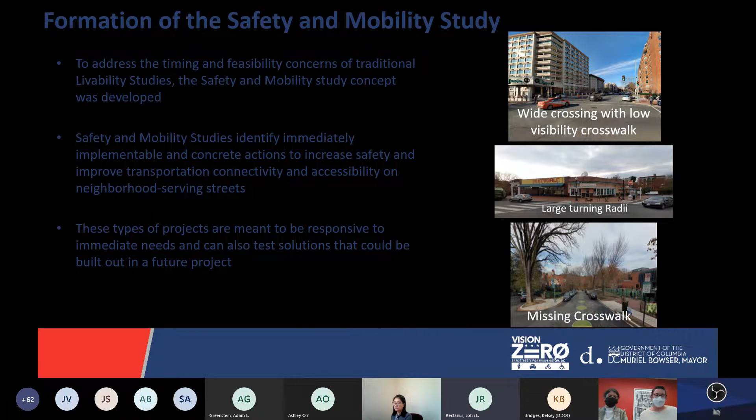So the expected outcomes of the safety and mobility study were essentially to focus on those short-term quick build projects. We are identifying and looking at 40 intersections within the study that we believe can be accomplished within 3 years, install 10 of those projects during the study, and install art in 5 of the 10 immediate installations.

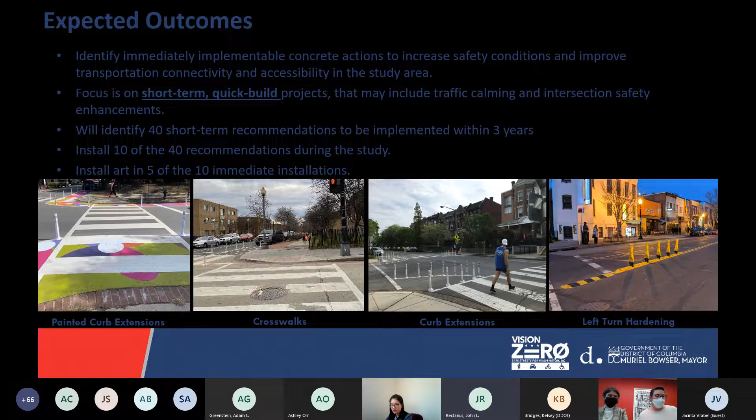So the Near Northwest 3 study, this was the study area that we looked at for this initial study. It actually has a very large population that commutes in ways other than a single occupancy vehicle. You can see the breakdown of that distribution at the bottom of this slide. It extends and has a huge portion of the district's population.

It includes 6 local ANCs, which are our smaller bodies that assist with neighborhood communication with DDOT and other government entities. It goes all the way down to the convention center to the south. It's between 2 major corridors, Georgia Avenue and 16th Street, with Mount Pleasant a little to the northwest. So it's a very diverse, dense area.

That was something we had to try and look at, making sure we're incorporating things throughout the corridor that can be beneficial to a community that, compared to the rest of the district, has a pretty large walking, public transit, and cycling community.

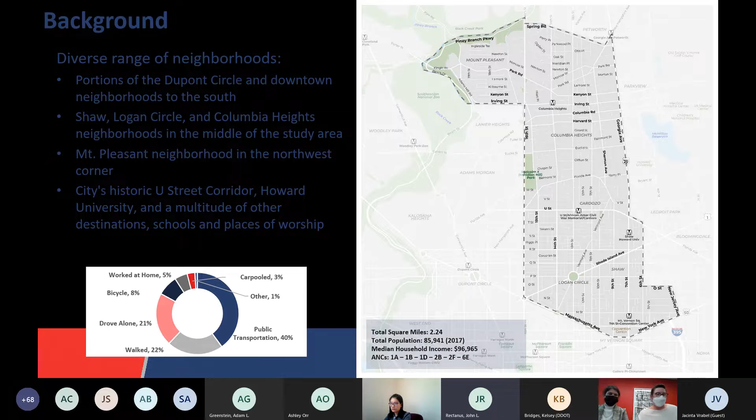We gathered information to come up with a preliminary assessment, like what has been asked in the past that maybe we had not delivered on, what is being asked now, and looking at past crash data, things of that nature. Then we evaluated those concepts and locations, and started looking at our toolkit to see what locations made the most sense, that we could have a larger impact.

Then we shared those with the community, revised them, and essentially we ended the project with 40 different design plans. The public engagement process—this was DDOT's first time incorporating an all Spanish component as well.

We had all of our meetings in English and Spanish, and our materials as well. We distributed throughout the corridor, and it was a good experience in terms of learning how to reach a community that, although we've always had access options, needed something more deliberate based on the community we were working with.

So I'm going to go through how we selected those 40 locations for treatments.

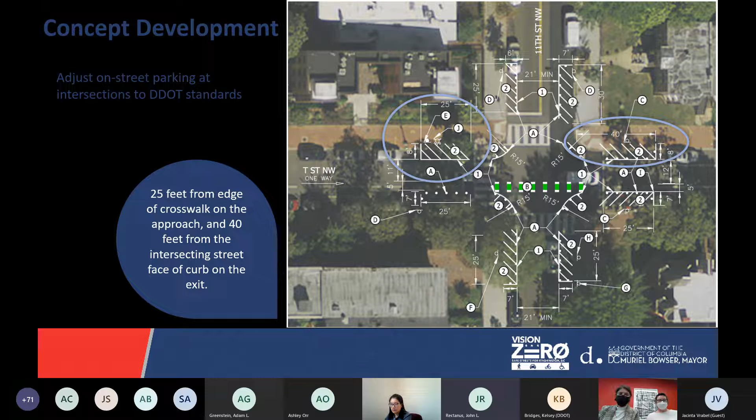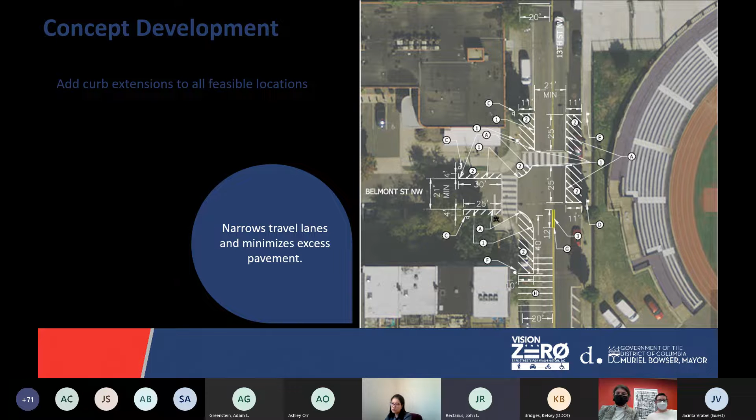We also looked at curb extensions where we could, pulling that curb out and bringing the curb radii to DDOT standards. So wherever we could get a 15-foot curb radii, we added it.

And then tightening up and teeing up intersections. We have some corridors that are all on angles, so most of their intersections are not at a T at 90 degrees, and we focused on teeing those up as much as we could.

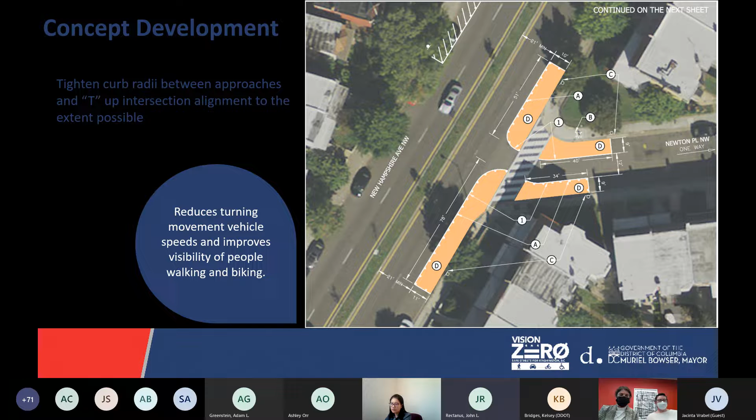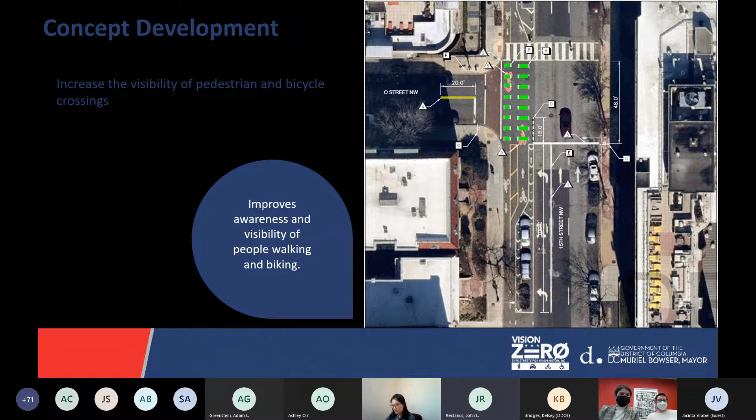And then just increasing the visibility of pedestrians and cyclists. Where we had bike lanes crossing, we wanted to make sure we were adding the green stripes through it. Where we could reduce the width of a pedestrian crossing, we did. Where we could add high visibility, we did. And lastly, we looked at where we could add left turn hardening to slow down those vehicles making turns so they can see the pedestrians as they're coming on.

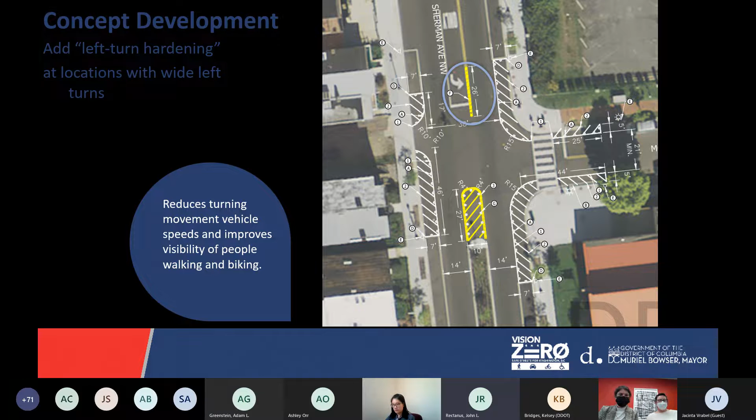Implementation. As I noted, we implemented 10 projects towards the end of the study, so essentially we went from our concept design to implementation within like 2 to 3 months. Obviously there was a lot of internal work to make sure we had that teed up so we could hand off the designs to be installed.

This helped bridge the gap of DDOT making plans but not always implementing. These projects, one of the things we said to folks who might not have been as excited about a tactical curb extension versus a concrete built-out curb extension, is that this gets the safety element in now. When we come back through with a streetscape or general paving, it's something we can make more permanent. So it's about how we can get the safety elements in now and have the same benefit, with some of the visual concerns addressed later or through art.

So with those designs, we put in the 10, and 5 of them did have art. We also, for the remaining 30 designs, had these cut sheets that you can see an example of to the right, showing Barry and 10th, which shows a tactical traffic circle, and a comment from someone who was very excited about incorporating the traffic circle.

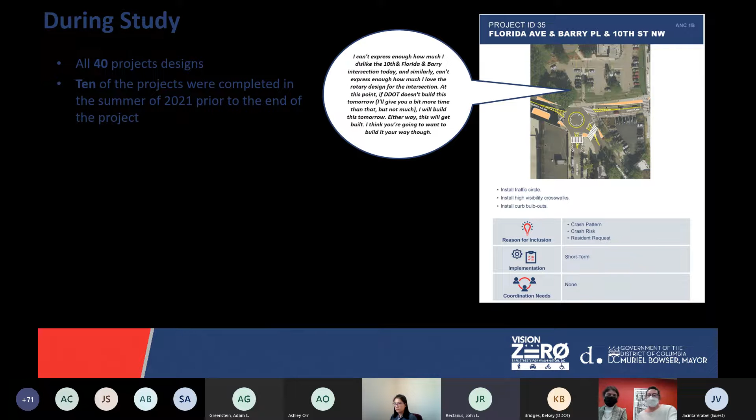As I mentioned, one of the criticisms tactical installations get is that they frequently get run over, aren't maintained very well, and aren't visually appealing.

We've incorporated art in other locations in the district, but this is the first project that's been part of a larger study. Whether talking to the artist or reading community comments, it really made people feel a new association with the space. It wasn't just a parking spot anymore; it became a neighborhood icon, viewed as public space in a different way.

So we included art that tried to reference the community and the history of the space. The top element with the zipper...

This piece celebrates Alma Thomas, a world-renowned artist who lived just a few houses away and is now featured in many museums, having a moment in lots of different areas. She lived nearby, and this is placemaking in terms of recognizing the history in this neighborhood that has seen a lot of change.

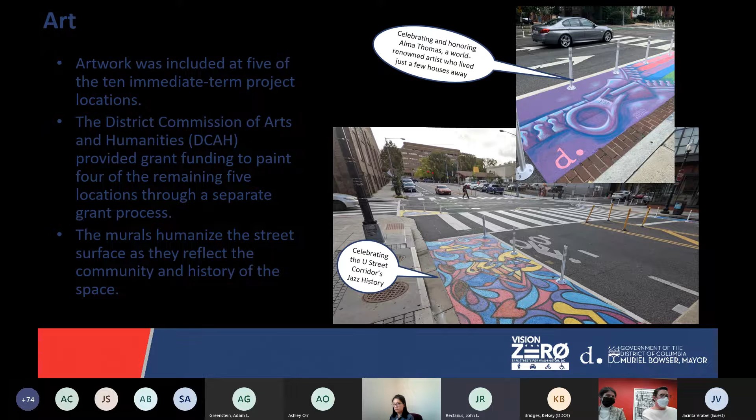Post-study, after finishing and implementing 10 locations, one of the great things is that the study included creating not just cut sheets but plans, shown at the bottom, that we can hand off to our contractors to install. It's a standalone document with the number of materials, what the materials are, and essentially all the dimensions needed, so someone can quickly install it.

This is true in lots of governments: towards the end of the fiscal year, you start looking at what money is left and what projects can be reassigned. Because we had ready-to-go projects, we were able to get 6 additional locations implemented within a month.

Some of them even incorporated art. This is something we didn't necessarily know would be as valuable as it was—we were able to quickly take advantage and have plans to install, essentially almost doubling the amount of installations we had promised at the end of the study.

We also found the benefit that this can easily be passed off to our stormwater team that does LID, or our engineering team. Even if they're not putting in something tactical, they can incorporate the design into something more permanent, including turning radii and things like that, which made the pass-off much easier.

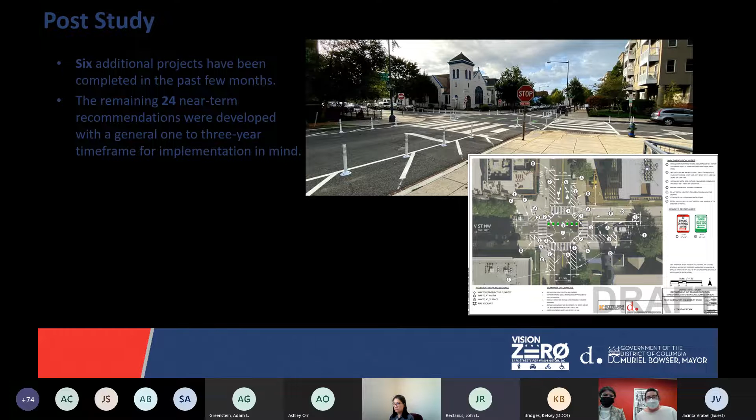I also wanted to show a picture. As mentioned, a lot of these projects were simple tactical intersections, but we left room for a few locations with what we called complex intersection designs. This one has a lot of paint and markers because it's a large intersection that could be narrowed, but this location doesn't really remove any existing vehicle parking. It's amazing what we're able to do here without necessarily changing how the intersection works. We have about 5 projects that fall into this complex intersection category that may need a little more internal work.

We definitely want to reach out to the community again before we implement this, because it would visually appear like a big change, even if what we're proposing doesn't automatically drastically change the existing conditions at the location.

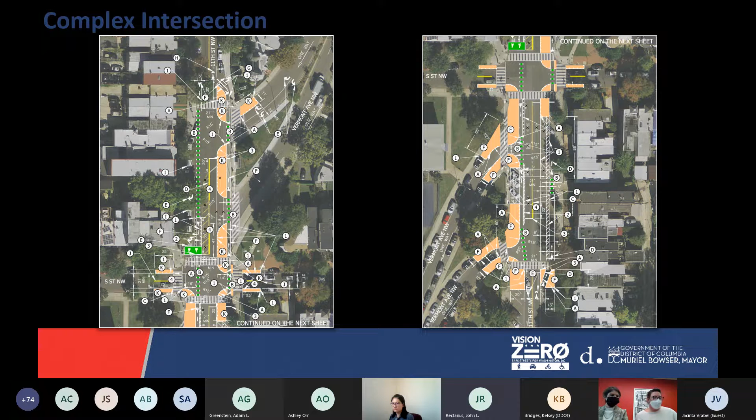One of the other things that the agency is learning is how to be a little more transparent with our projects. It is common for projects to be lost in the ether or a project website domain to be taken over. This is a DDOT website, it's attached to us, and we are also incorporating a project tracking element.

So not only can you go onto the website and see all of the designs, if you have a question or want to bring it up, print one of them out or all of them, you can also look at this interactive map we have that shows what projects have been implemented and when the remaining ones are expected to be implemented. And if you live on a special block and have a particular interest in a project, you can also look at that specific component.

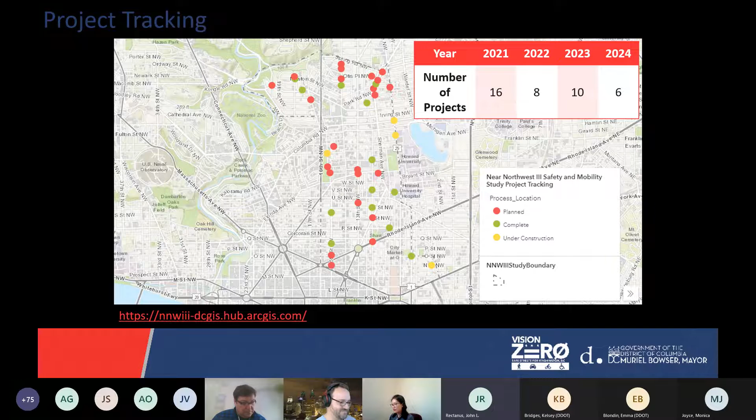Andrew is a senior engineer and a planner with the transportation policy team at the Montgomery County Department of Transportation. With 25 years of experience and a background in traffic design, operations, and safety, as well as special events and emergency management. For the past decade, he has focused on policy, master planning, capital projects, development review, and a breadth of miscellaneous efforts that do not quite fit anywhere else. He has been a member of ITE since the early 2000s, when he served among the leadership for Penn State student ITE chapter.

Steve is a transportation engineer planner with 36 years experience in transportation planning and traffic engineering. He works in the countywide planning and policy division, and he is in charge of highway planning, CIP, transportation agency coordination, and transportation mandatory referrals. Prior to joining Montgomery Planning, Steve worked in the private sector for most of his career, focusing on corridor planning, access management, highway safety, traffic operations, and signal design. He has been a proud member of ITE since 1987.

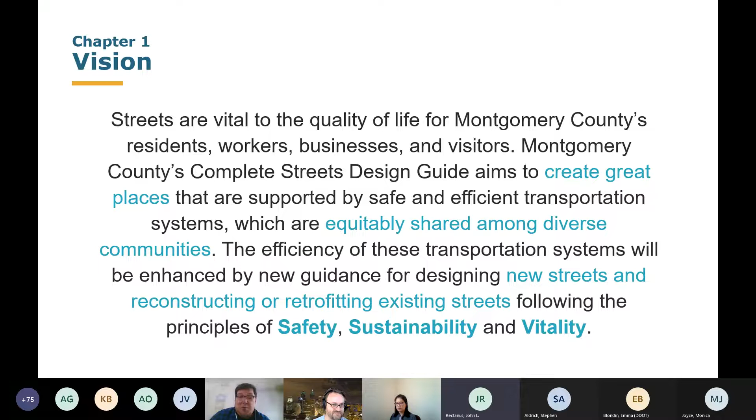The vision presents the goal for this chapter, which is to develop guidelines to help transform streets into great places that are equitably shared among diverse communities, following the 3 principles of safety, sustainability, and vitality. Montgomery County has over 1,000 lane miles of streets, and while this guide is intended primarily for county roads, we're hoping this is really the vision for what we'd like to see on state highways as well. It's critical that safety for all people is a key behind this plan.

Chapter 2 presents new street types that will be used to establish design priorities and parameters for individual streets. In Montgomery County, we've had street classification since 1931, probably one of the few counties to implement their own classification system. I think what we realized is we kept trying to change it as more advances happened, but we realized with complete streets, we really needed to rethink our street types entirely.

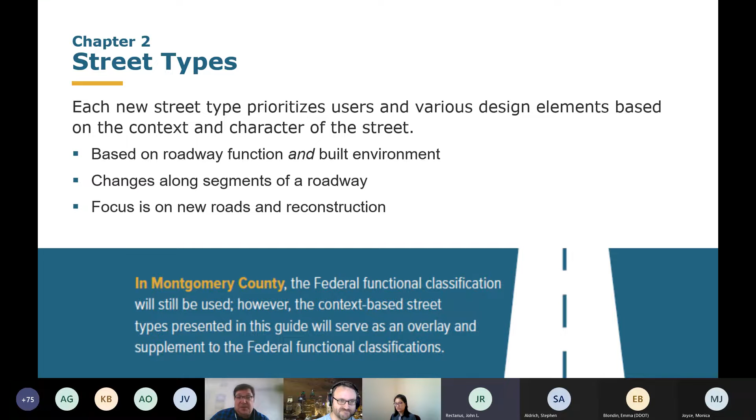These street types focus on the types of streets we want to be building moving forward, and they're largely defined by land use and urban form, as well as transportation function. They're going to vary a lot more because you may have an arterial going through an entire county, but it changes from rural to suburban to town center to different forms of urbanization. That's what we wanted to reflect.

There are 12 street types that we've developed for the county, and you'll notice some commonality between the names. They reflect several major land use contexts: downtowns, town centers, neighborhoods, and country areas. What's not listed there is suburban, which are largely the areas that are not highlighted.

Each street type in the guide has a 6-page spread that starts off looking like this. This is an example of the first street type, downtown boulevards. These are the main streets you would find in some central business districts. In Montgomery County, that would be Bethesda, Silver Spring, Wheaton, and White Flint. They typically have BRT routes planned along them and have frequent transit service and high pedestrian and bicycle activity.

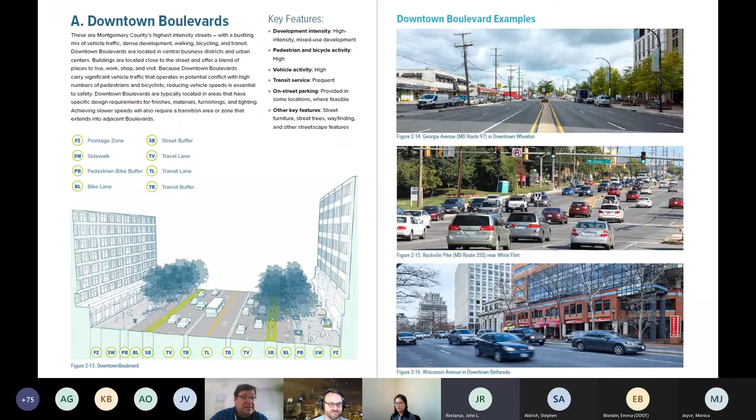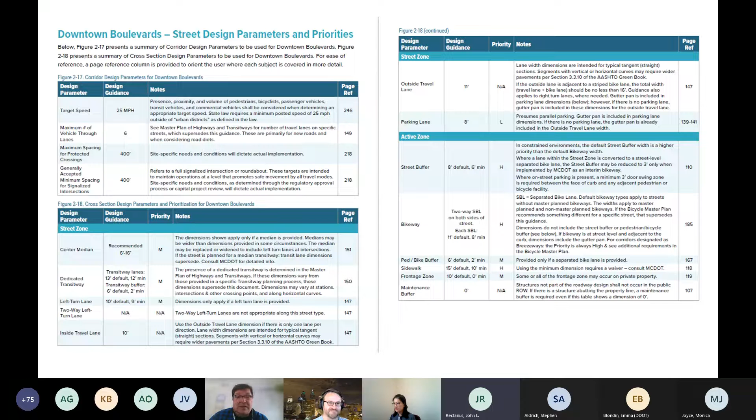The 3rd and 4th pages for each street type provide detailed design parameters. It's a little difficult to see here, but Andrew's going to provide a much better overview of the technical details. The idea is that you can turn to this and get all the technical information you need about the required elements along each street type. The remainder addresses the widths of various items in the cross-section and their default and minimum widths and priorities. The priority is really important, and Andrew will talk about this in terms of how you actually make everything fit, because fitting all these components into a master plan right away isn't always possible—so there has to be some kind of priority system.

The last of the pages for each street type is a list of street design features, and identifies whether they're required, recommended, optional, not permitted, or not applicable.

I did want to mention the current draft—you may see red pages here and there, and that's because the document, while approved, is still in draft form until we pass through a county council review and incorporate the changes into the county code. At that point, a final version will be produced.

In addition to core street types, there are also more rare or unusual street types that the guide will touch on briefly. Many of these are already covered in county code.

We have not found alley designs to be high level detail, and our experience with shared streets, known as woonerfs, is still limited. There are two types of rustic roads currently used in Montgomery County. Those are pretty much rural streets with a hands-off approach, trying to maintain the rural rustic character of those roads. Those are incorporated by reference within our document, and in future versions we might tackle the shared street issue a little bit more.

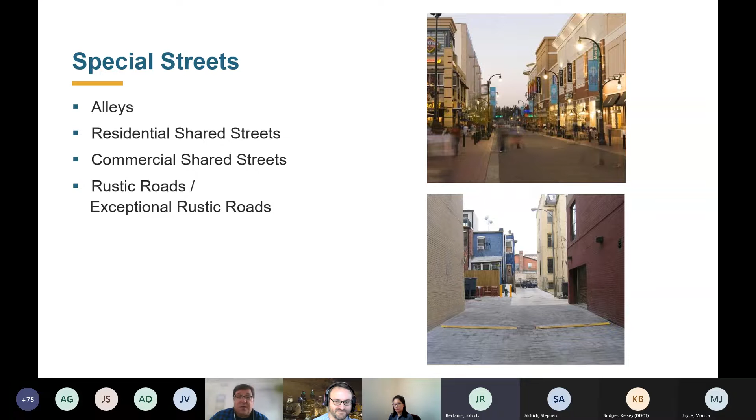Now with that, I'm going to turn it over to Andrew, who is going to take us through a deeper dive in some of the design details. Good afternoon, I'm Andrew Bossi with the Montgomery County Department of Transportation.

I'm about to talk about a whole lot of zones. First, there are two overarching zones: the active zone behind the curb, and the street zone within the curb. Each includes smaller zones within them that I'll dive further into. Two things I'll call out here are the bikeways, shown behind the curb in the active zone, buffered on both sides from street traffic and pedestrians. The triptych graphic on the right also shows bikes might share with pedestrians on a side path, or they might be retrofitted into the street zone, within the curb-to-curb street area.

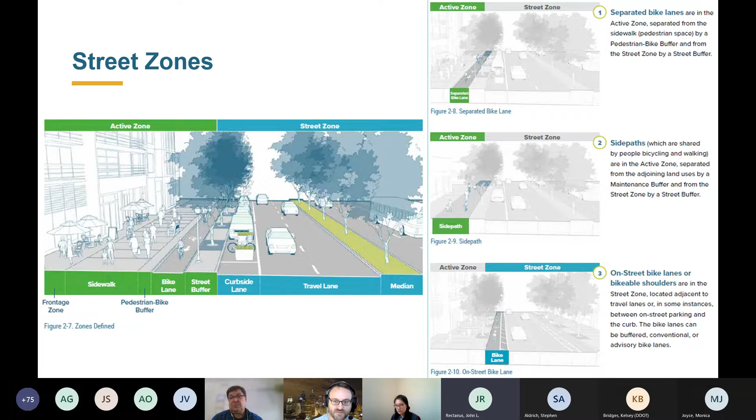Now to dive into those zones, Chapter 3 focuses on the active zone, which includes elements between the curb and the property line.

On the outside, the maintenance buffer and frontage zone are up against the right-of-way line. They allow for ease of maintaining the adjacent sidewalk, and can also serve as amenity spaces like outdoor cafe seating. Where right-of-way is constrained, they're often among the first areas to be cut, though a 2-foot maintenance buffer is required if there's a building or other structure along the property line.

The sidewalk or side path area is intended to be completely clear, meaning no signs, poles, or inaccessible grates. It's supposed to be as straight as possible, and pavement must comply with ADA requirements. These clear zones have been our standard for many years, but this is mostly just making them even bigger, particularly in downtown and town center areas.

Next there's the pedestrian bicycle buffer, bike buffer, and then the bike lanes. The vision is for bike lanes to be part of the active zone, improving their separation from motor vehicles as well as pedestrians. The buffer separating the bikeway from the sidewalk and side path might provide street side furniture, depending on width, that could have trees, benches, bike racks, or space for dockless vehicles. It's a versatile interface between bikes and pedestrians.

The street buffer zone is the separation between bikes and motor vehicles. That's where you usually find landscaping in particular, with poles, signs, parking meters. It might be used for stormwater management and other green streets efforts, including trees. Open section streets might use the street buffer for graded drainage ditches. Basically, the street buffer is envisioned to be a really versatile area that knits together the street zone and the active zone.

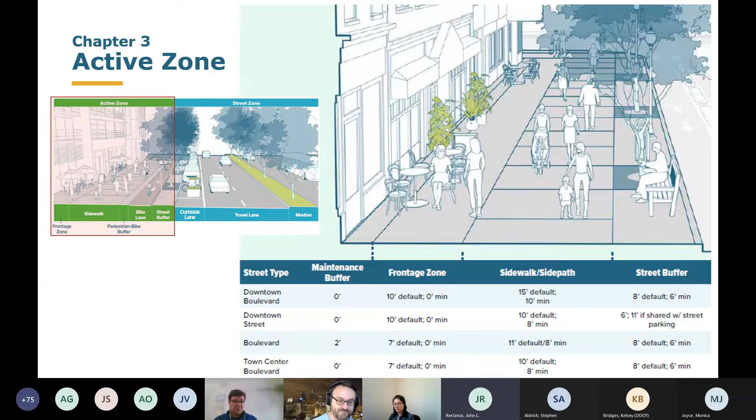Chapter 4 focuses on the street zone, the vehicular area between the curbs. This area is comprised of three smaller zones: the curbside zone, which has parking, loading, and parklets, and might also include retrofitted bikeways; the travelway zone; and the median zone, which includes the travel lanes, transit lanes, and median.

The chapter also includes guidance on car share and electric vehicle parking, mobile food vending, micromobility corrals, utilities, and network connectivity. Network connectivity is planning level guidance, not quite as engineering-focused as much of the manual, but it basically says we want streets to link up to other streets to provide redundancy, and to get away from dead-end streets, especially those that hinder pedestrian and bicycle movement across them.

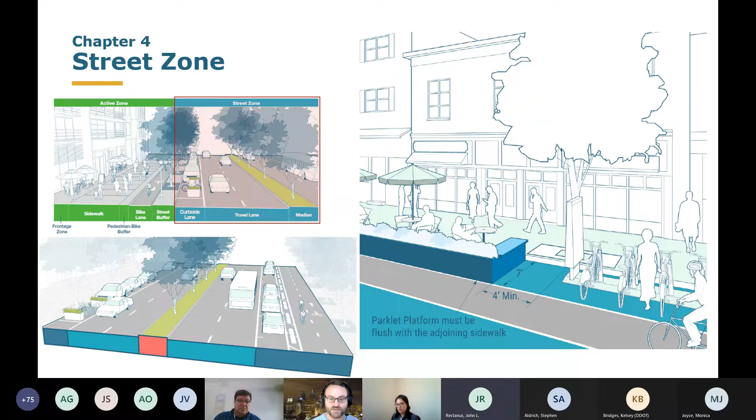The guide includes widths for each street feature, including travel lanes, as you can see on the screen here. The current road code calls for narrower lanes only in downtown areas, and we're looking to take this even further, perhaps most noticeable in the town center and neighborhood areas. This is an important part of both slowing traffic as well as reducing crossing distances for pedestrians.

Our guide does call out that there may be reasons why these lane widths might need to be wider, such as if there's a high volume of large vehicles like buses or major truck routes. Another thing to keep in mind is along horizontal curves, where your effective width can shrink and you need to widen your envelope slightly to account for a vehicle's envelope as it goes around the curve. With a minimum street width of 21 feet, this fits within fire access requirements.

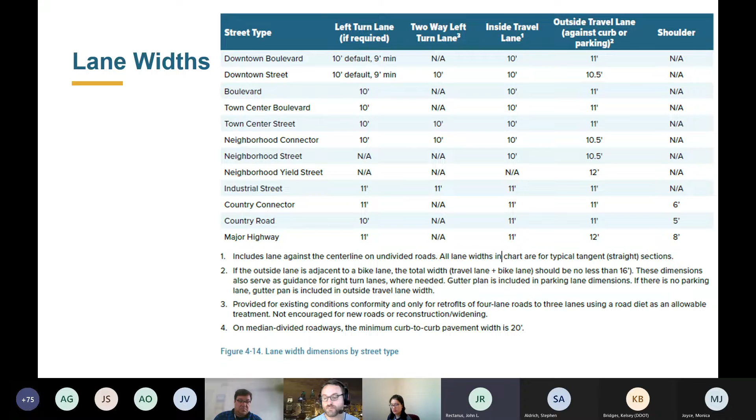This also allows for fire access needs along one-lane streets, which require 12-foot lane widths and periodic 8-foot emergency lane access areas. While we have guidance on two-way center left turn lanes, this makes it clear that these really aren't a preferable treatment and should be used only in limited circumstances.

Before I get to the next chapter on bikeways, I want to divert briefly to prioritization. As Steve mentioned, we have prioritization for each street type and each street feature. When there isn't enough right-of-way to fit everything in, that priority provides guidance on how to go about reducing things. Each street feature has a default width that we would start with, and then as we need to shrink things down, there's also a minimum width that we can shrink toward. You'll see that maintenance buffers, medians, and on-street parking are often the first to be reduced.

Street buffers, sidewalks, side paths, and bikeways are upheld across nearly every street type. If you narrow things down to their minimums and you still need more space, cutting things not included in master plans may now be an option. In my piloting this since about early 2020, I've found that this often means cutting parking in order to avoid cutting down higher priority elements like the stuff in the active zone.

Of course, if a master plan calls for something, the expectation is that it cannot be cut. It needs to be provided at some point over the lifetime of that master plan. That is an example of where acquiring additional right-of-way may become necessary, though I've not found this to be necessary in the vast majority of cases that I have piloted this on.

Chapter 5, following the active zone and the street zone, focuses specifically on bikeways. This largely pulls directly from our bicycle master plan, which was completed in 2018. It's a fantastic plan. I urge everyone to take a look at that, and maybe I'll try to remember to put a link in chat when I finish speaking here.

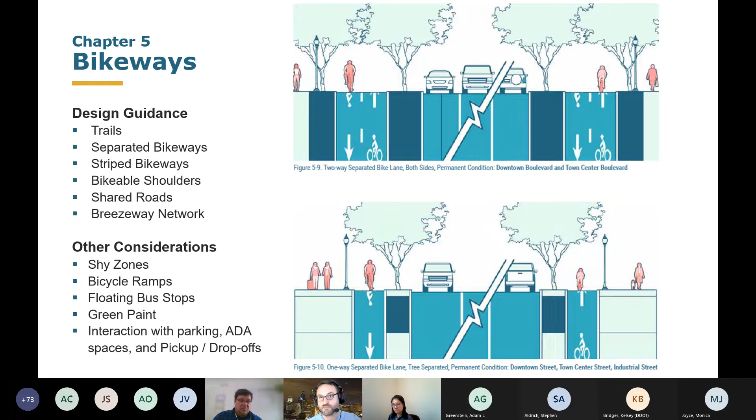Default bikeways are shown here for each street type. Master plans can override these defaults, as can detailed engineering if it's found that something different and hopefully better makes more sense. Most notably, our guide suggests separated bike lanes in downtown and town center areas, which helps separate traffic by giving bicyclists their own spaces apart from both motor vehicles and pedestrians. In areas with fewer pedestrians and bicyclists,

shared ped-bike side paths remain the default, but they are generally proposed to be wider. There are of course some areas, even in those more rural areas, where things like separated bike lanes might still make sense. As I mentioned, this just lays out the defaults—as part of master plans or engineering, those extra needs can be identified and refined.

The bike master plan also added something called breezeways, which I don't think are reflected on what I have on the screen here, but they're basically like bike highways. They're intended to be high quality, high separation, and wide enough to allow side-by-side riding. This guide includes some basic design guidance on these, and I expect that will continue to evolve as we get a better sense of those facilities over time. Right now, we don't really have any built, but we'll get some eventually.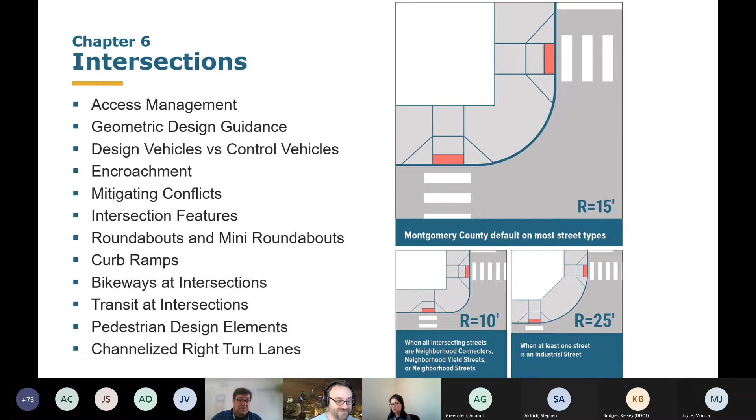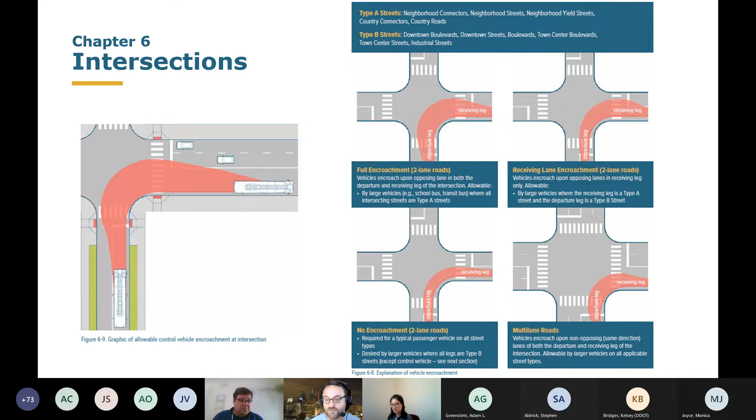At the left, there's a single example showing and allowing full encroachment when it comes to control vehicles, again fire trucks. This helps get us away from the longstanding practice of building overly large intersections centered around fire trucks, when in reality a fire truck has greater capability than many vehicles to command the right-of-way and navigate with encroachment. These turning patterns were developed in partnership with our fire staff, and we're glad to have had them as partners in these efforts.

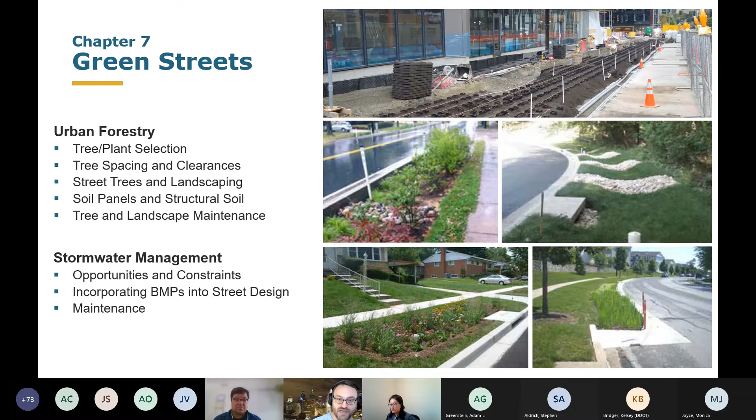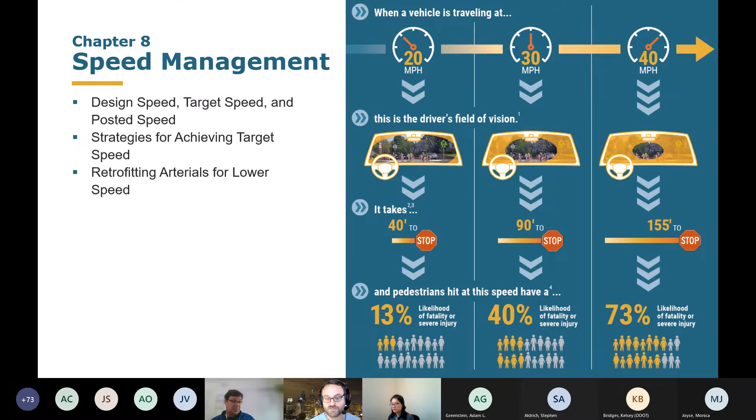We generally use 4 different types of speeds: target speed, design speed, posted, and operating speeds. Each sort of leads into the next, and the ultimate goal is for all 4 to eventually be equal. The target speed is basically a master plan speed, and that's what is covered by this guide. It's the ultimate speed that we want motorists to travel at in the lifetime of a master plan.

The design speed is what engineering would use, to try to get people to that target speed. Posted is what goes on the signs, which should reflect the design speed and the target speed. And then operating, hopefully following the signs, which is the design, which is the target.

In many areas, state law restricts us. Actually, that may have changed recently, I have to refresh myself on that. But state law has restricted us from posting speeds under 25 miles per hour in many areas. So at the moment, these may be somewhat visionary, and we hope that in coming years, or possibly now, changes to state law will enable us to put these into effect.

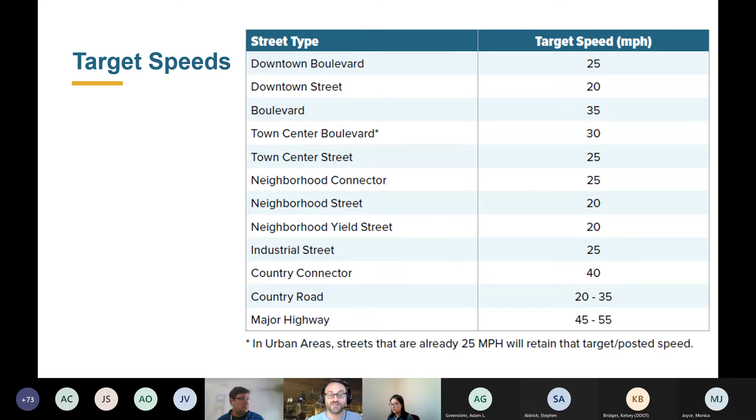For this slide, I'll add that the energy here is on lowering speeds. And if there are areas today with lower speeds than we show here, it doesn't mean we're going to go out there and increase them. It just means that, like other things in this guide, you can still override what is in here as long as there's reason to do so, like it's already slower. That's a good reason. Speed management.

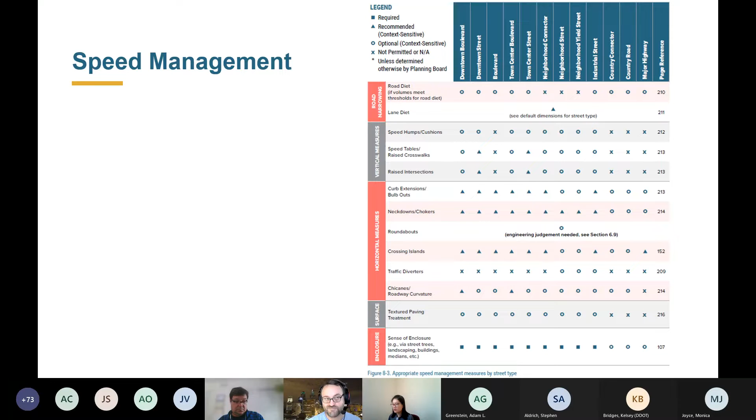Surface treatments like using lines or rumble strips across a roadway can make a motorist feel like they're traveling quickly, or perhaps using textured pavements. Rumble strips, of course, bring noise concerns—that's a whole topic in its own.

I want to highlight a big part of what Complete Streets seeks to accomplish. A goal here is creating self-enforcing roadways where people naturally respond to the design of the roadway and travel accordingly. This goes hand in hand with nationwide attention on the role of police and even non-police enforcement. By reducing the need for traffic enforcement in the first place, Complete Streets seeks to reduce these inequitable risks and impacts to the public, especially those at an elevated risk due to demonstrated biases in enforcement.

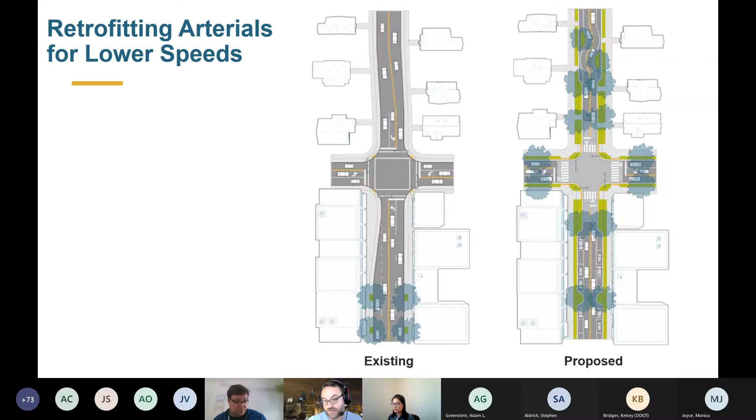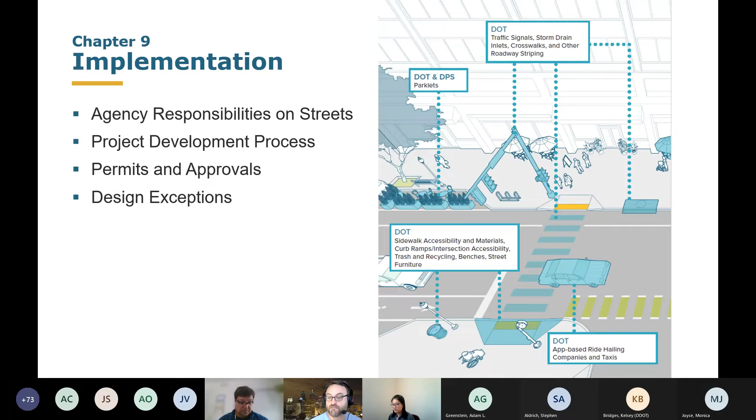Chapter 9 is about implementation. The graphic shown here is an excerpt of a larger 2-page graphic showing who maintains what along a typical street. The section includes guidance on prioritization, specifically calling out equity emphasis areas, school zones, and bike-ped priority areas as places where higher prioritization should be considered.

This chapter includes a 2-page pair of flowcharts that shows how projects can go from conception to construction. The left side, which I have on the screen here, shows public capital projects, and the right side, not shown here, shows private development projects.

With that, we're pretty much at the end of the document. It's again intended to be a living document, and we're watching a number of other efforts that will likely feed back into future versions of this guide. There's the ongoing access management guidelines, the pedestrian master plan, our general plan called Thrive Montgomery 2050. They've all been sort of built off of our Complete Streets work and will likely themselves feed back into future updates. I also think we can get more robust—there's a lot of topics on my short list: ADA guidance, loading, bus stops and pickup drop-offs, more detail on driveways. It's a lot of things that I think this could still grow in the future.

With that, I'm going to turn it back to Steve for our closing slides, and we'll head into Q&A.

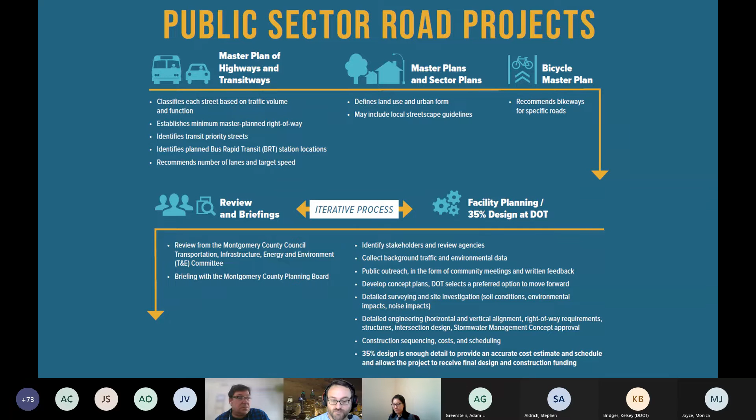Okay, real quickly, and I'll try to answer some of the questions real briefly. We're headed to County Council review. We hope that's going to take place this summer. We are still working on changes to the draft code legislation to make it a reality.

The code includes an initial translation so that existing street classifications will automatically become complete streets street types. That would be a temporary fix until the planning board authorizes an update to the functional master plan of highways and transitways, which would likely take place in 2023.

Just as background, when we were working on this project early on, our consultants spent a lot of time looking at other complete streets plans, including Prince George's County, Alexandria, Dallas, Boston, a bunch of places across the country. We were also in coordination with SHA as they were developing their context-driven guide. So there's a lot of consistency—not necessarily the exact street terms, but certainly in terms of the concepts, and in some cases even the preferred dimensions identified.